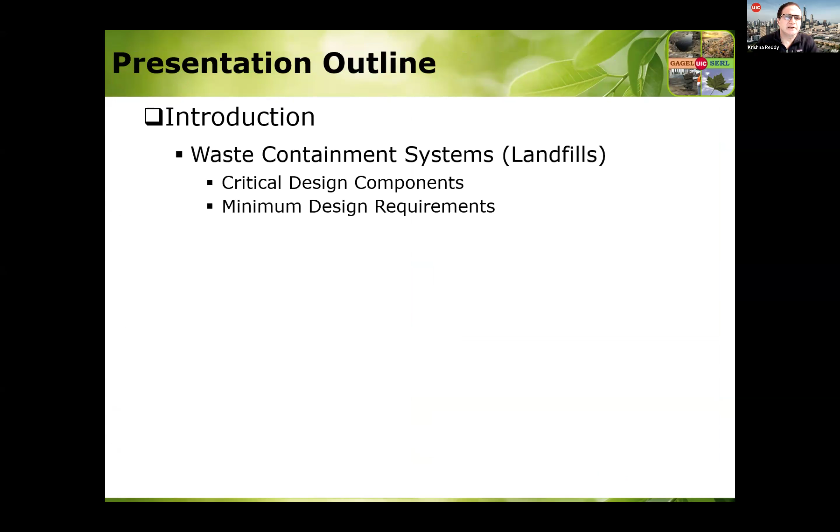Coming back to the presentation, first I want to introduce waste containment systems, basically landfills. I'll mention the critical design components and the minimum design requirements for them, then show how we can incorporate sustainability into the design of these components. I'll present a framework and examples of how to select sustainable waste containment components, and then give final remarks.

Let's get into the introduction. Many of you may not be familiar with waste containment systems for municipal solid waste. So what is municipal solid waste? It's any materials, trash, refuse, or garbage that you throw away from homes and small businesses. It's basically the garbage, and as you know, it is generally collected by governments from homes and small businesses.

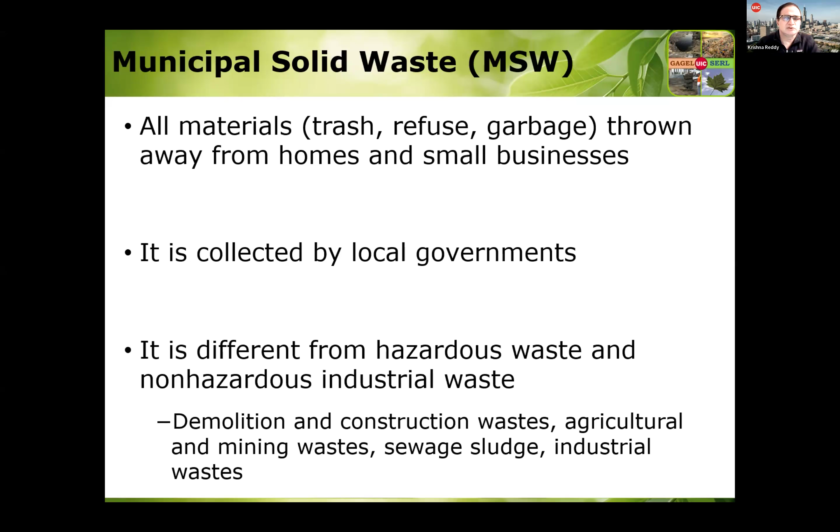Municipal solid waste is different from hazardous waste; it's generally considered non-hazardous. Sometimes you also have industrial waste that is non-hazardous, and this combined with non-hazardous household waste is what we call municipal solid waste. Obviously, it is collected and needs to be handled properly.

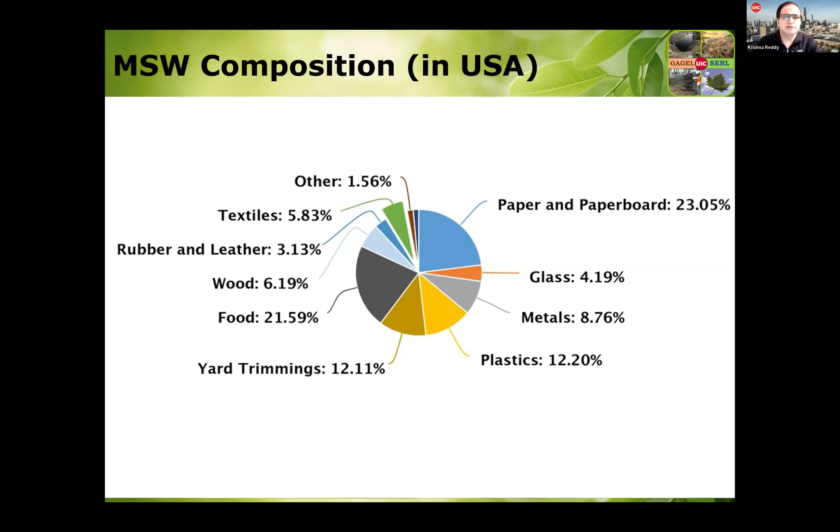Otherwise, this is the municipal solid waste you're looking at. The composition varies from location to location, but it's very important to handle properly. What is the composition of municipal solid waste we dispose of from homes or other facilities? This is the typical composition: it has plastics, metals, glass, paper and paperboard, yard trimmings, food, wood, rubber, leather, textiles, and other things. But this composition is from the US, and it varies from country to country, and even regionally within a country.

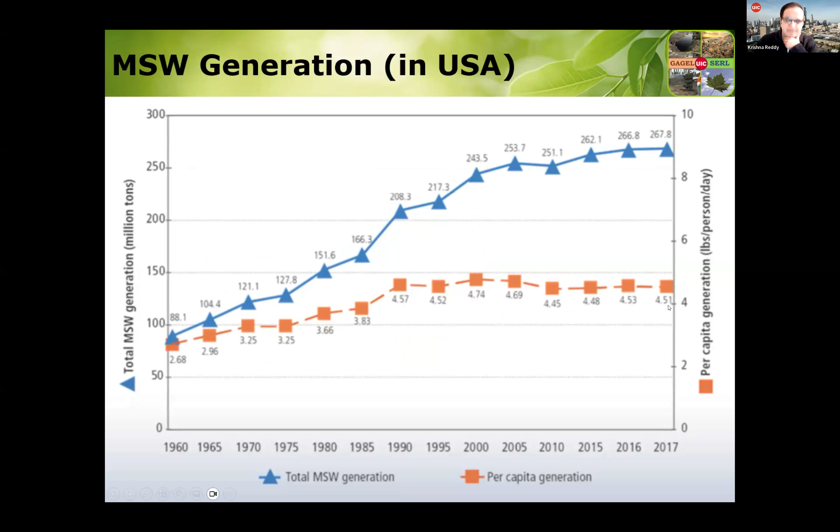In the municipal solid waste in the US, we generate about 267 million tons per year, which translates to about 4.5 pounds per person per day. That's a lot. So what are we doing with this waste that's generated?

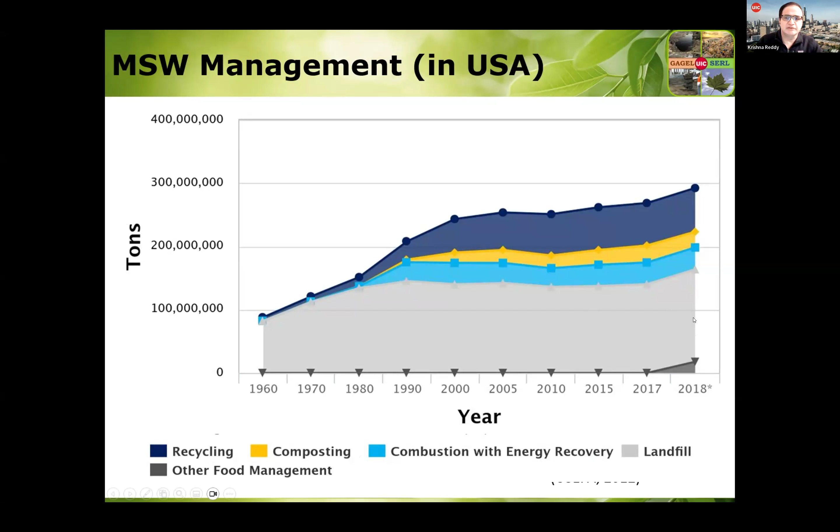This shows the total waste generated, and how much is recycled, composted, combusted with energy recovery, landfilled, and other management options. If you look at this graph, the landfill portion is more than 50% of the waste. So more than 50% of municipal solid waste is going to landfills, making landfills a very important aspect of waste management.

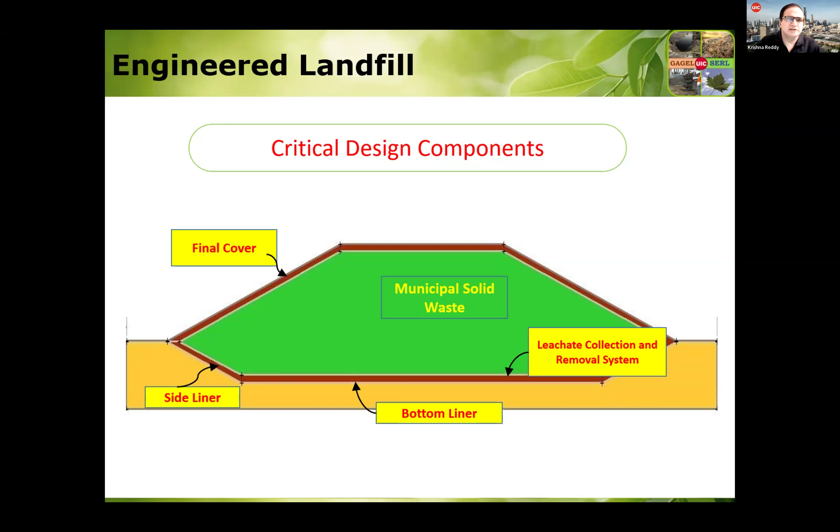Landfills are engineered structures with important components that need to be properly designed. Basically, you excavate below the ground, construct a bottom liner and side liner, and have a leachate collection and removal system. Then you pile up waste in layers, compact it, and once capacity is reached, put a final cover. From an engineering standpoint, the bottom liner, side liner, leachate collection and removal system, and final cover are extremely important and should be properly designed.

So in the US, we have federal laws and regulations that are applicable for landfills. The main federal law is called the Resource Conservation and Recovery Act, and it's a regulatory approach. You have to follow this.

Under this, US EPA has regulations that require dumps to be closed, and for new landfills, there are requirements on how to design them. The states must develop comprehensive management plans, and they might have more stringent landfill design requirements.

CERCLA, or Superfund, is another law that addresses abandoned dumps and landfills that pose an imminent risk. So any dump or old landfill that is not being taken care of and is posing a problem of contamination to the subsurface or surrounding environment gets immediate attention to be cleaned up under this law.

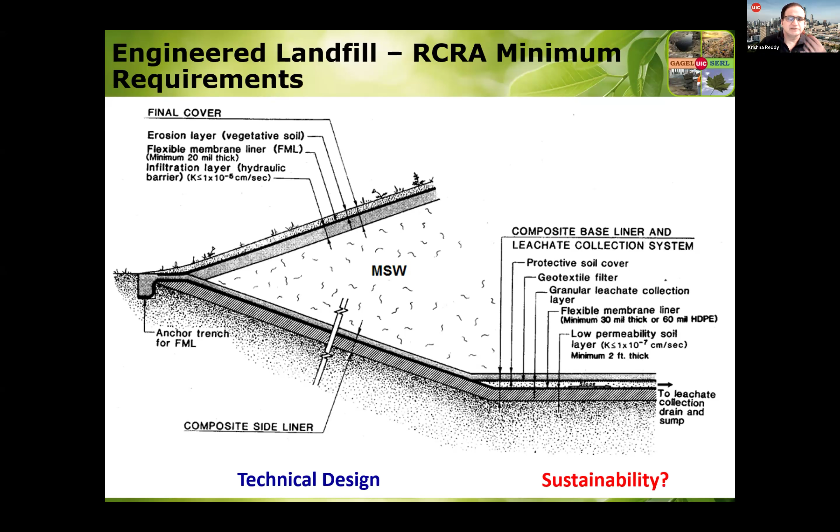A lot of times we just do the technical analysis and recommend the design, but we don't consider sustainability. Now it's becoming very important to consider sustainability in addition to your technical design. So you have to combine the technical design and sustainability so that you have a sustainable waste containment system.

If you are not familiar with landfill design, I highly recommend you look at this book. It tells you a lot of details about how you design the liner system, leachate collection system, and the final cover system - that's the waste containment system with its components and minimum requirements.

As I said, you do the technical design, but how do you do the sustainability assessment? Whatever I've designed, is it sustainable? Or are there other options you can think about, or can you optimize the system you are designing for sustainability? So this is important.

For this, you need to think about what sustainability is. This is the broad definition: development that meets the needs of the present without compromising the ability of future generations to meet their own needs. That's a very generic definition, but then you have functional definitions given by different agencies, and the definition is a bit longer than the generic one.

But the most important aspect of all the functional definitions is this: environmental, economic, and social conditions. That is often called the triple bottom line. So the concept, or essence, of sustainability is captured by these three aspects.

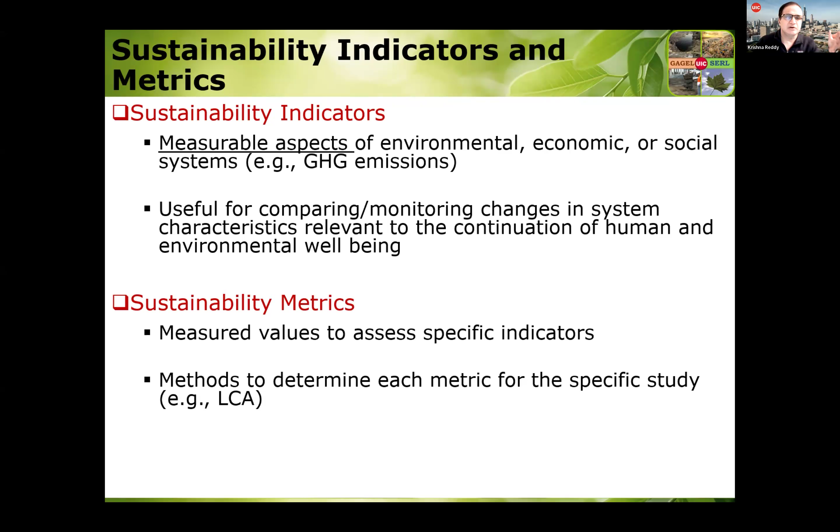In order to quantify sustainability, you need to define environmental indicators, economic indicators, and social indicators. Then you need to select them so that they have metrics, or can be expressed in numerical values, and you should have tools to calculate them.

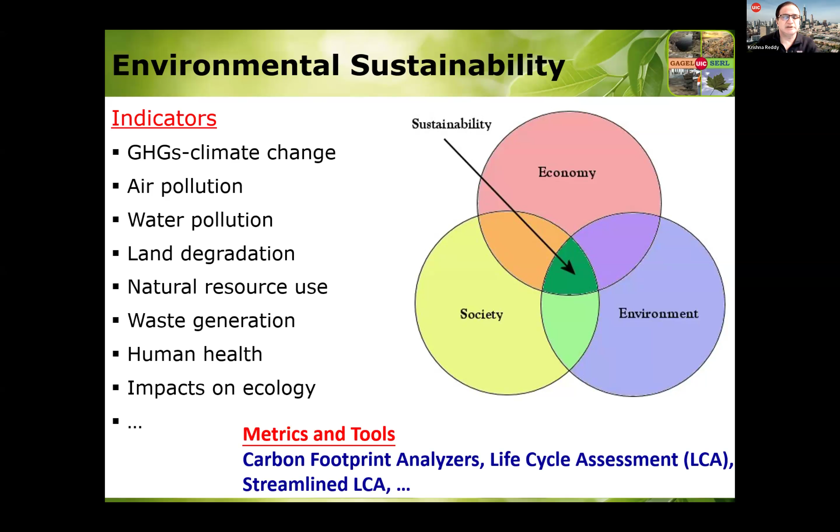For environmental sustainability, you can define indicators that represent various environmental impacts, and those impacts should be calculated using certain tools. For example, carbon footprint analysis gives you a carbon footprint, and a more comprehensive approach is life cycle assessment, or streamlined life cycle assessment. There could be a lot of other tools, but life cycle assessment, LCA, is the most comprehensive tool used to assess environmental sustainability.

Remember, a lot of people assume that doing LCA is a full sustainability assessment, but this considers only one aspect of the triple bottom line. Economic and social aspects are not considered; those are equally important and need to be considered in addition to environmental sustainability. LCA gives you environmental impacts, some indicators and metrics, which you can calculate.

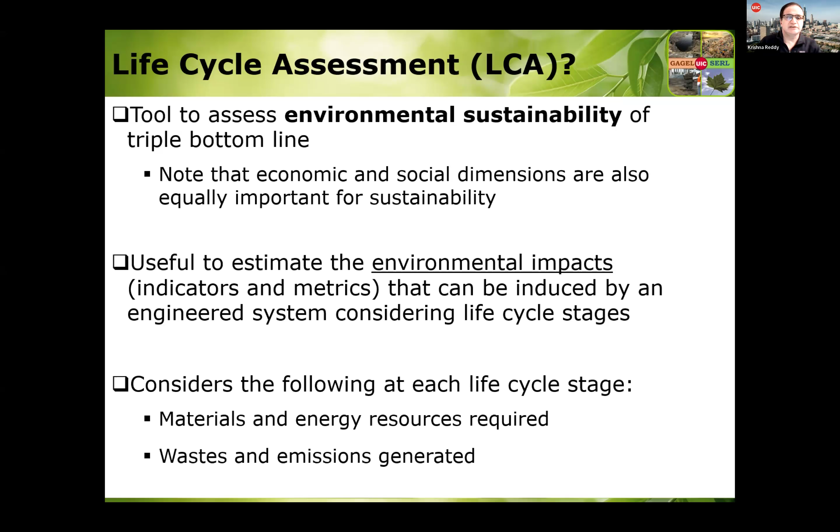You can calculate these things during the entire life cycle of a project, from raw material acquisition, transportation, construction, operations, and so forth. In LCA, you consider what materials and energy resources you are going to need, and the assessment gives you the consequent waste and emissions. So waste and emissions are basically the environmental impacts.

A good thing about LCA is that the method is standardized. ISO LCA standard, ISO 14040, is what you have to follow if you are doing the LCA approach. LCA is defined as the compilation and evaluation of the inputs and outputs and the potential environmental impacts of a product system throughout its life cycle. That's how the ISO standard defines it.

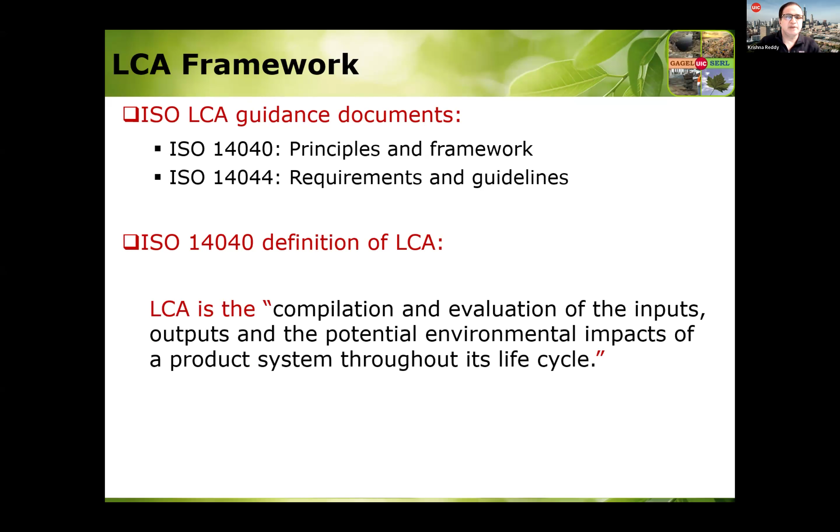So basically, as I mentioned, it takes materials and energy as inputs, and the outputs are the environmental impacts, which you can then assess from a sustainability point of view.

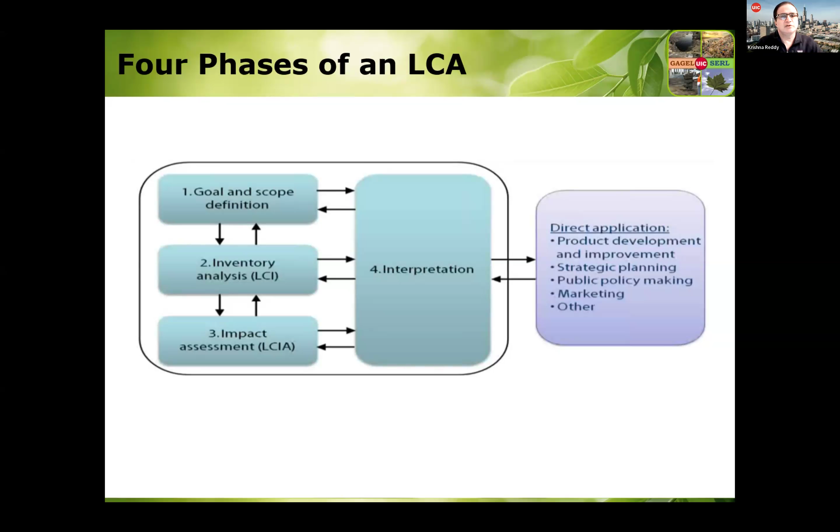This methodology has 4 phases: goal and scope definition, inventory analysis, impact assessment, and interpretation of the results. Anybody who does LCA has to follow these 4 phases or steps of the analysis. I'm not going to go into the details of those 4 steps.

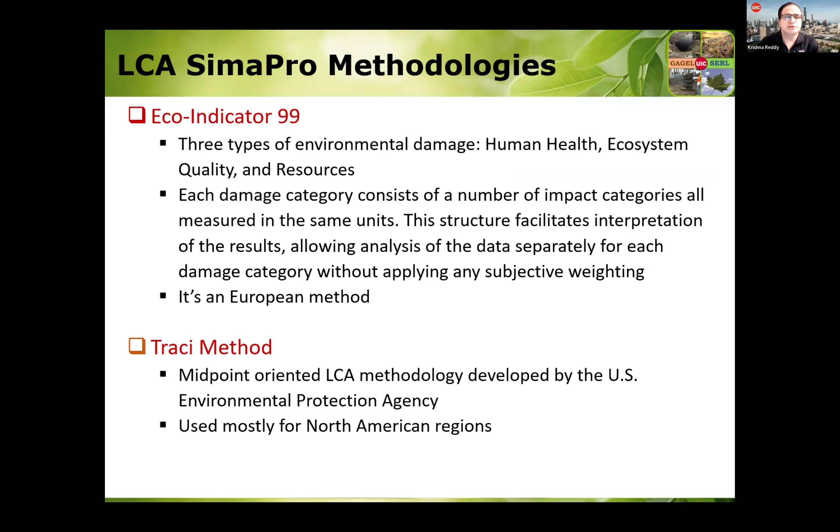SimaPro is one of the softwares used to perform LCA assessment, and within it, there are different methods of doing the impact assessment. Eco indicator is one of them; this is basically a European method. TRACI is another method, developed by the US Environmental Protection Agency. So in North America we use TRACI, and eco indicator 99 is used in the European context.

So if you are in India, you have to think about which methodology you should use for environmental impact assessment. That's about environmental indicators and metrics. If you have special tools, you can use those, but if not, LCA is the most general methodology to calculate environmental indicators.

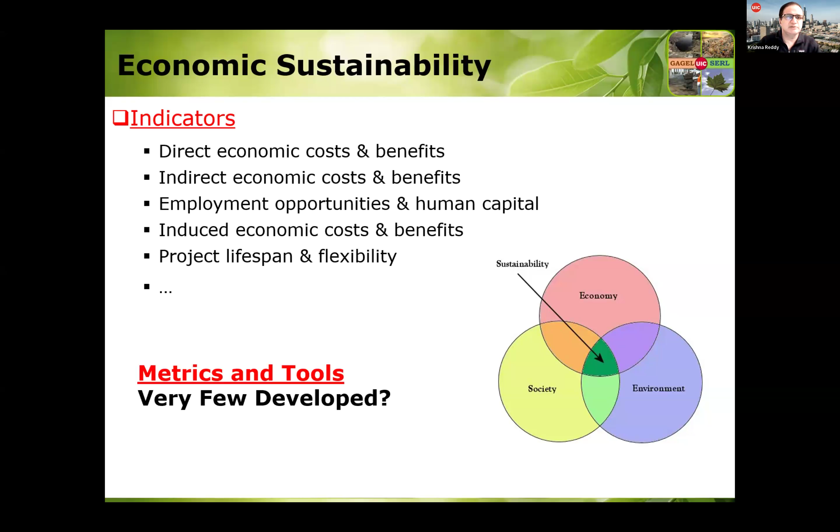In terms of economic sustainability, you need to identify indicators like direct economic costs and benefits, and indirect economic costs and benefits, and find appropriate tools. Often we are not familiar with economic assessments, but you need to get help or learn more. You can use tools like life cycle costing or cost benefit analysis and so forth.

For social sustainability, this is very challenging.

This is about how communities or individuals affected by the project are going to be impacted. So you need to be very careful about how you select these indicators. And then the problem is you need to be able to quantify it. There are not many tools to quantify this. One of the tools is the social sustainability evaluation matrix, or there could be other frameworks that, if you have access to, you can use those.

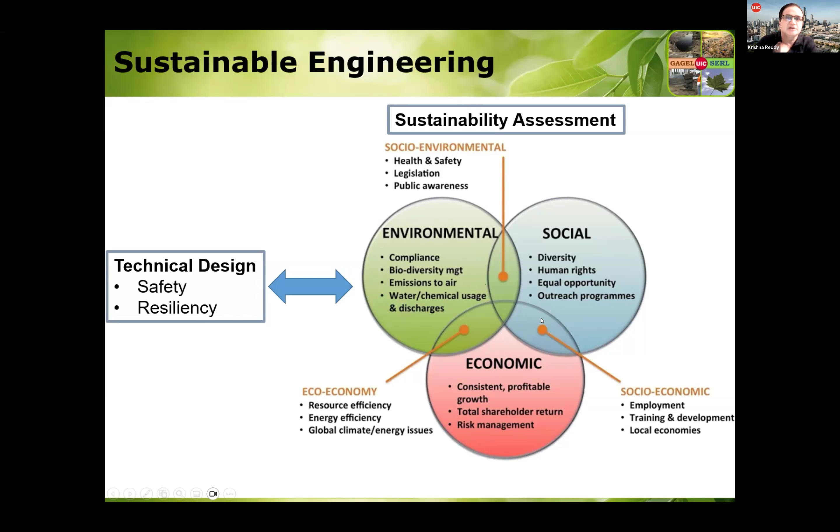So if you have those triple bottom line indicators and metrics, the sustainability assessment is all about calculating these indicators for your technical design. So you have the technical design that considers safety and resiliency, and then you subject that technical design to this triple bottom line aspect. That's basically called sustainability assessment - considering the environmental impacts, economic impacts, and social impacts, and quantifying them through indicators and metrics.

I know a lot of you may not be familiar with sustainability assessment, so I highly recommend you use this reference book so you can understand the basics, and also various tools on sustainability assessment. Once you have that framework, I want to show how this framework can be used to design sustainable waste containment systems. I'm going to look at different components of the waste containment system and how you can assess the sustainability of potential options.

If you want to choose this option, start with this requirement, and then do the performance analysis, and you may want to increase the dimensions of it. Now, this is called prescriptive criteria. But US EPA also gives you the flexibility to look at alternatives.

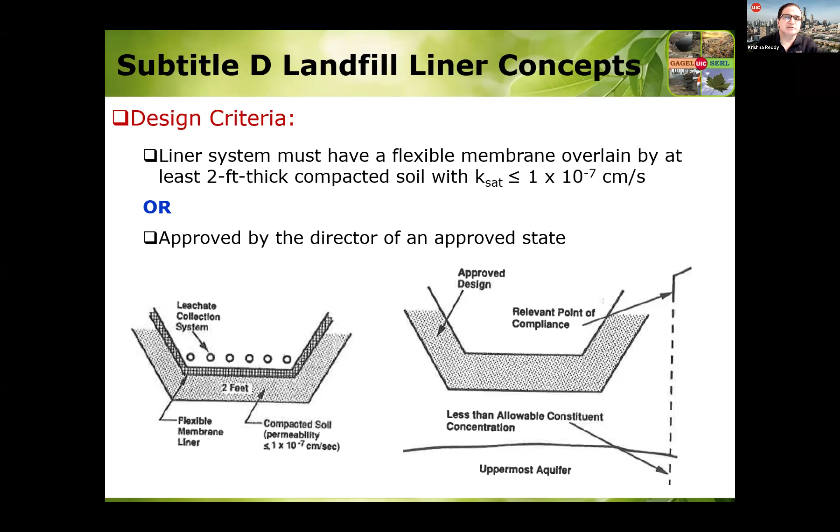Because of these things, you can have a very prescriptive design, or you can have alternative designs. Since regulations allow you to have alternative designs, you can apply the sustainability criteria and select something more sustainable. What I want to show you is examples of liner systems.

For example, this is the most conventional liner system. According to the regulations that you saw, you need to have compacted clay - for example, I'm looking at 24-inch thick compacted clay. On top of it is HDPE geomembrane, and then on top you have a leachate collection system and landfill waste. So this liner here is the composite liner - compacted clay and geomembrane. That's how the minimum requirements in the law state it. But you could have alternatives.

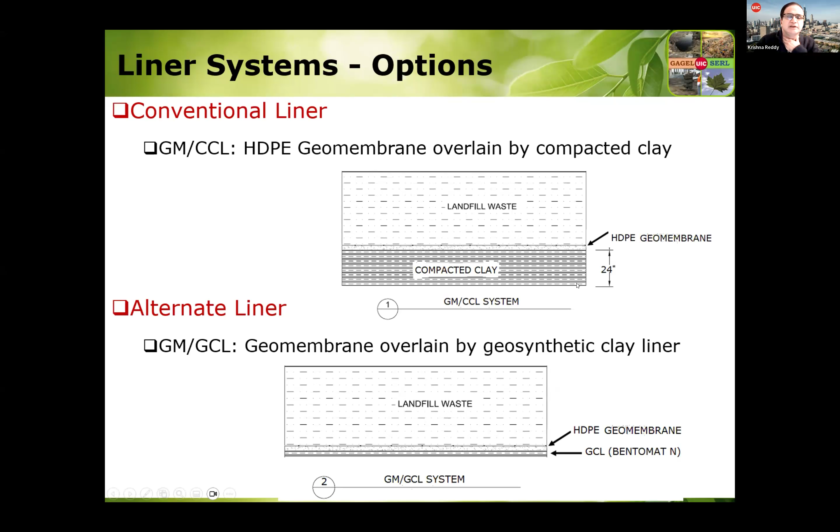So instead of compacted clay, can I use a geosynthetic clay liner? It's basically bentonite sandwiched between geotextiles, and that thin layer can be equivalent to 24 inches of compacted clay. On top, I have HDPE. So in terms of technical performance, you can demonstrate that these two are equivalent.

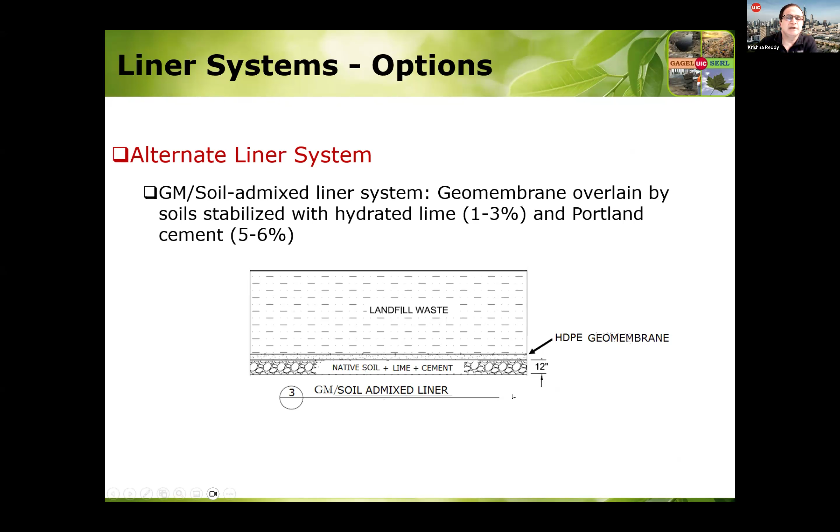Alternatively, they say if you don't have clay that is good - 10 to the power minus 7 centimeters per second - can you use native soil and add some lime and cement and make sure that soil meets the requirement of 10 to the power minus 7 centimeters per second, and then you can have an HDPE liner. So if you don't have good clay, you can use whatever native soil you have - maybe you can do this ground improvement option and make it equivalent to good clay.

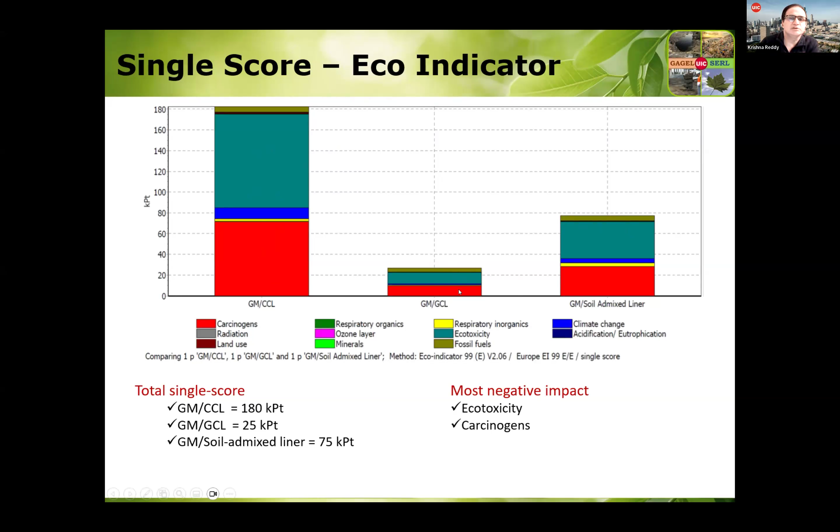More number means more impact. Geomembrane GCL has the least impact. Geomembrane and the soil admixture liner, that's the third option, as intermediate. So you can see from an environmental point of view, the most environmentally sustainable option is the geomembrane and the GCL.

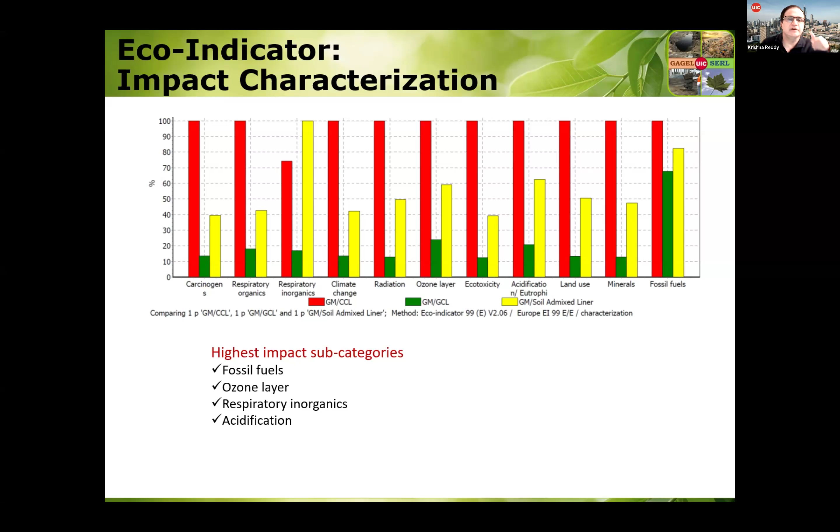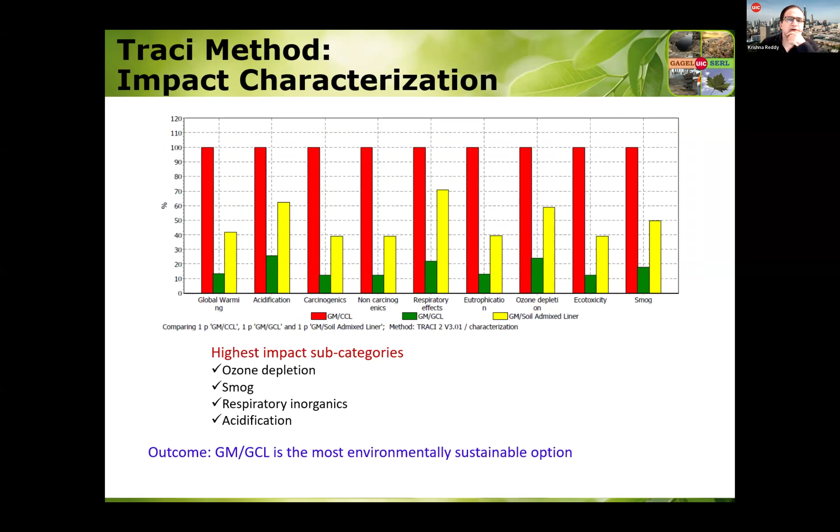So all three liners are performing very well technically, but from an environmental sustainability point of view, you can point out one is better than the others. The one I mentioned here is the eco indicator. Here is the TRACI method, which is used in North America. You will find consistently the same kind of results: geomembrane GCL is the most environmentally sustainable option. So that's the environmental dimension of sustainability.

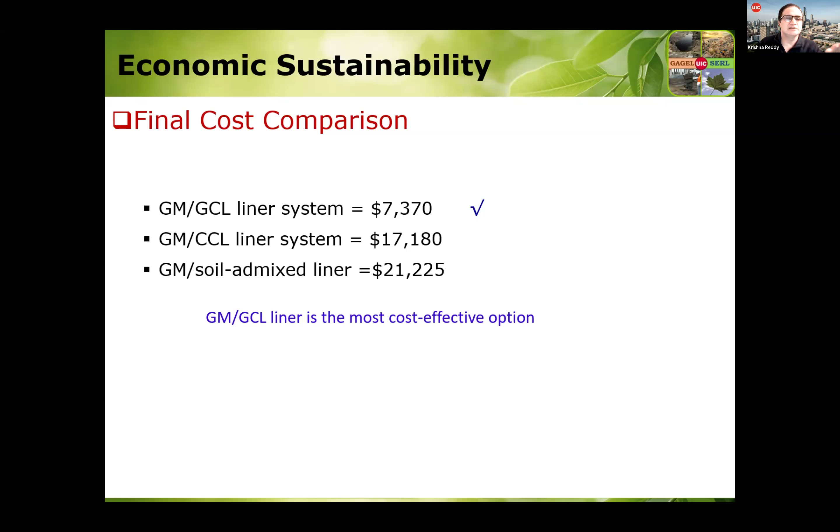You need to look at economic sustainability. Here I'm looking at just the cost, how much it costs for constructing these three options. You can see for 1 acre of landfill liner construction, geomembrane and GCL costs less compared to the other ones. So the geomembrane and GCL system is not only environmentally sustainable, it's also economically sustainable.

Last dimension is the social sustainability. You can have a different type of social sustainability assessment system, and this is the one we are using. We're looking at the impacts to the workers, to the consumers, local community, and society, and under each of these you have different impacts.

One simple way to quantify them is: 0 means no social impact, 1 means negative impact. So if you don't have any negative impact, it's 0, and if you have some negative impact, you put 1. You add them up for all these indicators. The one with a higher number has more negative impacts, and the one with a lower number has less negative impact. Again looking at this, geomembrane GCL has the lowest number, meaning it is the most socially sustainable option.

So from environmental point of view, from economic point of view, and from social point of view, using the geomembrane and GCL composite liner system is the most sustainable option. That's how you can look at the different alternatives for composite liner systems and select the better one. Let's look at other components.

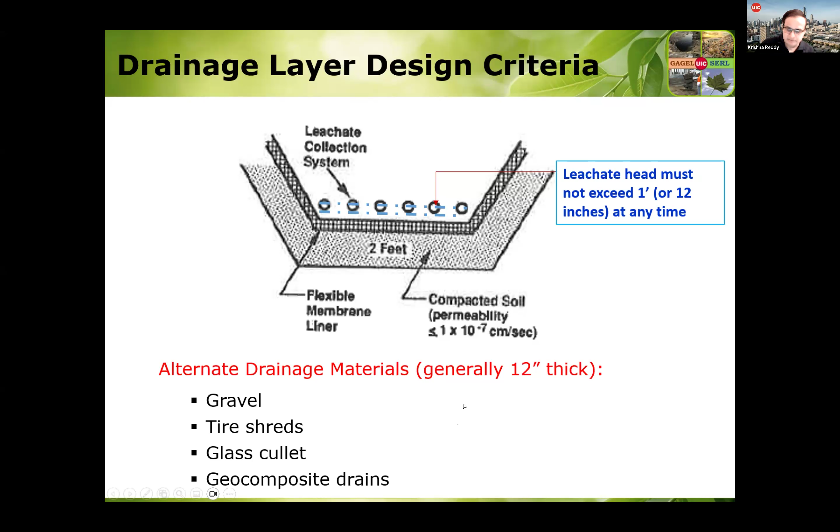So the granular drainage material that you can use, you have a lot of different options. You could use gravel, tire shreds, glass cullet, or geocomposite drains. The question is, all these things have high permeability, and all of them meet the requirement of 1 foot. So literally, you can meet the technical criteria, but from a sustainability point of view, which one is better to use?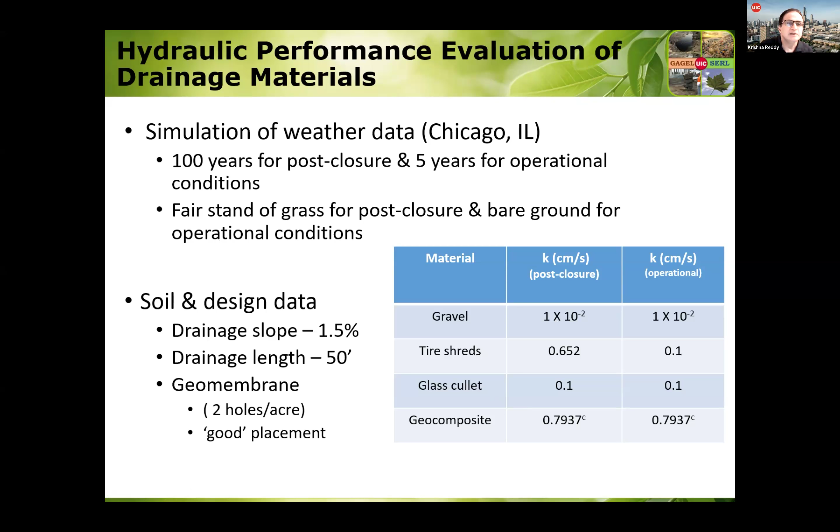For doing that technical assessment, we use the program called HELP. I'm not going to go into the details of it, but you need to input the hydraulic conductivity of the materials you're using - gravel, tire shred, glass cullet, and geocomposite - and specify the location. Then you simulate what will happen during the operational phase for like 5 years, or after closing, after putting the final cover, for 100 years - what will happen to the leachate buildup at the bottom.

You put all that information in and do the analysis, and our target is to make sure leachate head does not exceed more than 12 inches, so 1 foot. You can see that whether I use the gravel, tire shred, glass cullet, or geocomposite, my leachate head is always less than 12 inches. That means I can use any of these materials.

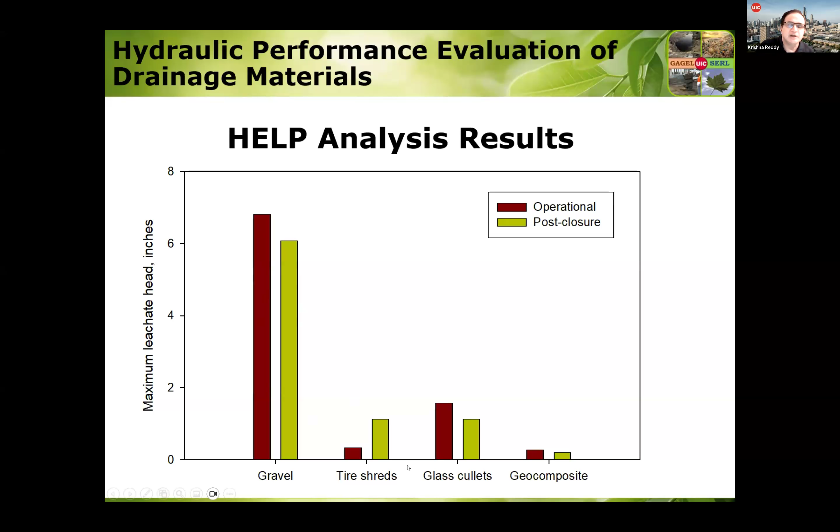Of course, these tire shreds, glass cullet, and geocomposites appear to be more efficient in terms of drainage compared to the gravel. So out of these materials, which one should I use from a sustainability point of view?

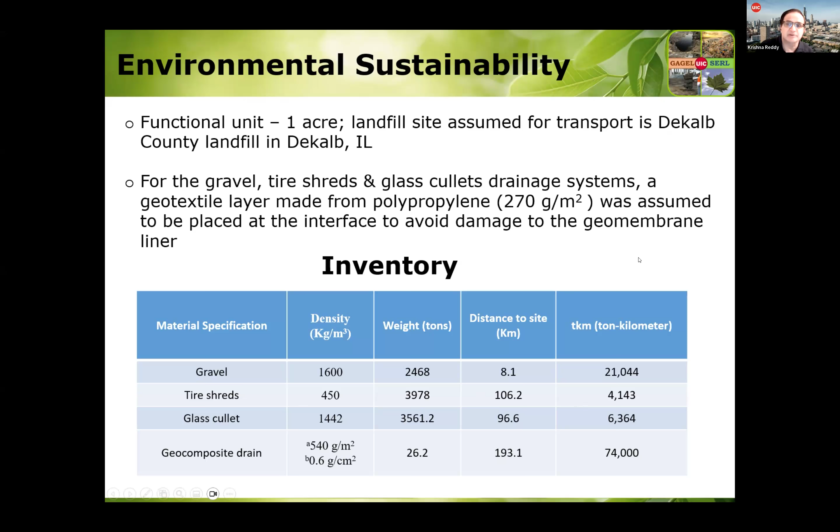So you do the environmental sustainability assessment. Again, we can do this for 1 acre, knowing the exact location of the landfill and what materials you need and where you're getting them from. Transportation distances are very important because transportation could cause a lot of environmental emissions. By doing the LCA analysis, you can calculate this environmental impact.

You can see that the higher value means a more negative impact. So the geocomposite drainage layer system has a higher value compared to these other systems. Based on that, you can see which material is more sustainable. The majority of the impacts come from fossil fuels during transportation.

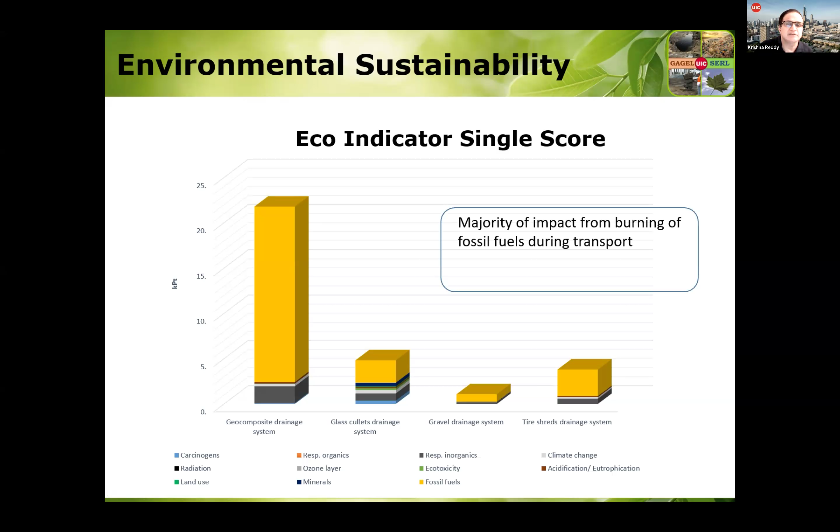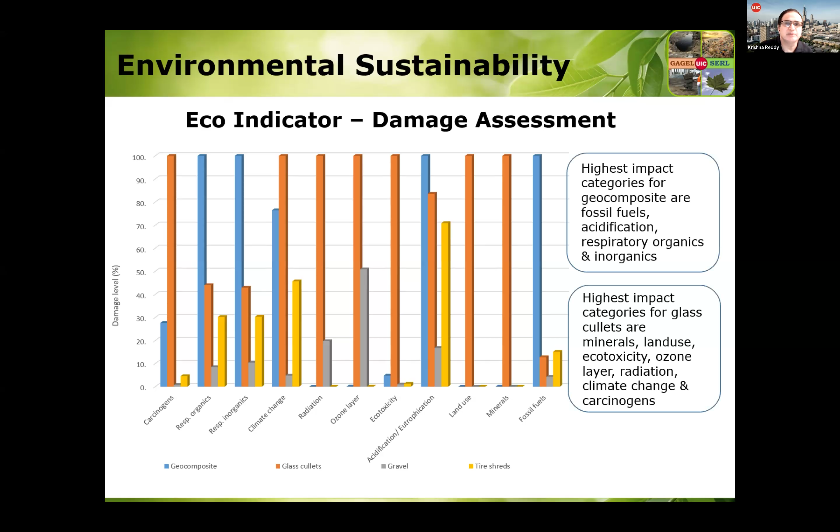So if one of these materials isn't available at the site and we have to transport it from long distances, then the environmental impacts associated with that will be higher - not because of the material, but because of the transport. When you do the LCA assessment, you can quantify all these different environmental indicators and compare all the options you have, and make decisions based on which one is more sustainable.

That's environmental sustainability. The second dimension of the triple bottom line is economic sustainability. At minimum, you can calculate the costs associated with this. But if you want to be more comprehensive, you can look at indirect costs, indirect benefits, and so forth. But just based on direct cost comparison, you can see...

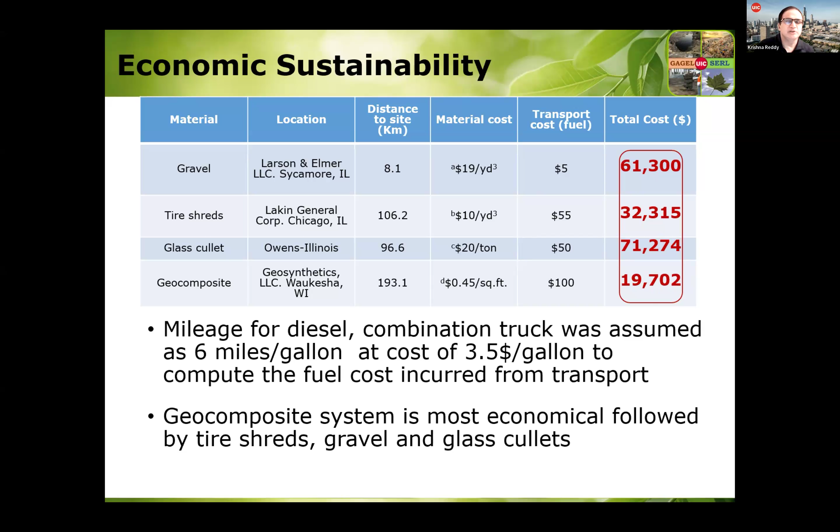The tire shreds cost is $32,000, whereas geocomposite is $19,000. So geocomposite comes out cheaper for this, based on the material availability and the transport distances you have.

And for social sustainability, again using the similar framework I mentioned for liner systems - you can say zero for no social impact, no negative impact. If you have some kind of negative impact, I can put 1. The one which has the lower value is more socially sustainable. The geocomposite drainage system seems to be more socially sustainable.

So you have environmental sustainability, social sustainability, and economic sustainability, and you have to make a decision based on those indicators and values. We can do the same thing for the third important component of the waste containment systems, which is the final cover.

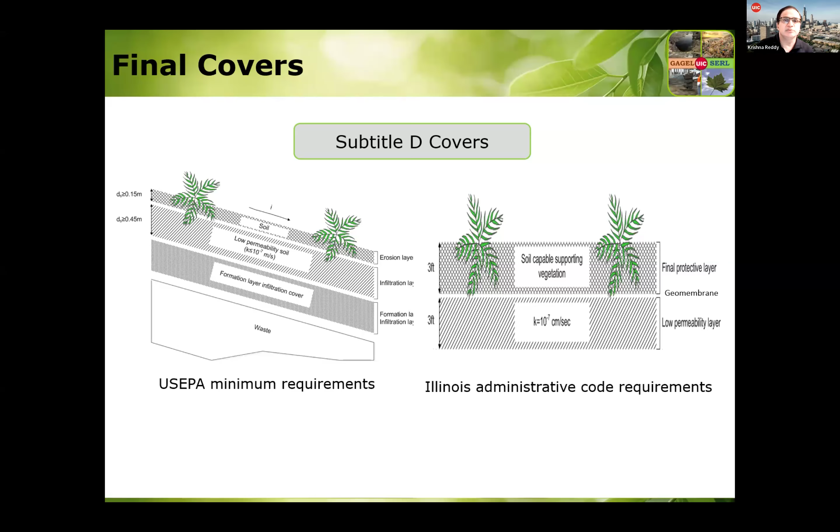As I mentioned, US EPA has the minimum requirements, and states could have different requirements. So you need to know what the minimum regulatory requirements are based on the location. You have to look at federal regulations and state regulations, and meet all of those requirements. That's the minimum requirement.

Then you need to think about other options, alternatives. Again, you can do the performance assessment to make sure the performance is satisfactory no matter which option you're looking at. Technical performance, you cannot compromise it.

Here I'm looking at Subtitle D without geomembrane. We have waste, and we're talking about the cover placed on top of the landfill. The waste is placed, and on top you have 18 inches of thick layer and an erosion layer. This is the minimum requirement - you have to have these two.

Sometimes you may have to use a geomembrane to reduce infiltration of precipitation. So here you have two clay layers, but in between you have a geomembrane. In some cases, you can have just a geomembrane - this is called exposed geomembrane.

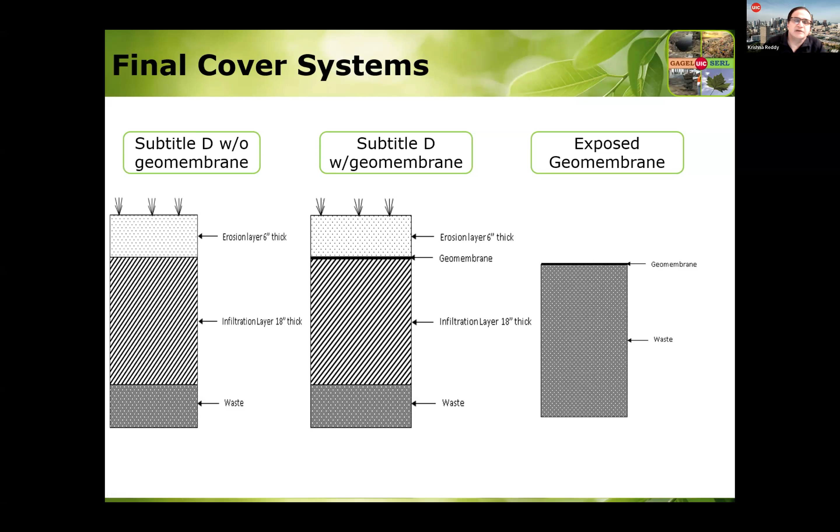So you can see this one is two soil layers. This one is two soil layers with the geomembrane. This one has no soil layers, just the geomembrane placed on top. There are some cases in the US where you have just the exposed geomembrane liner placed on top of the landfills. So these are three possible final cover scenarios for US landfill conditions.

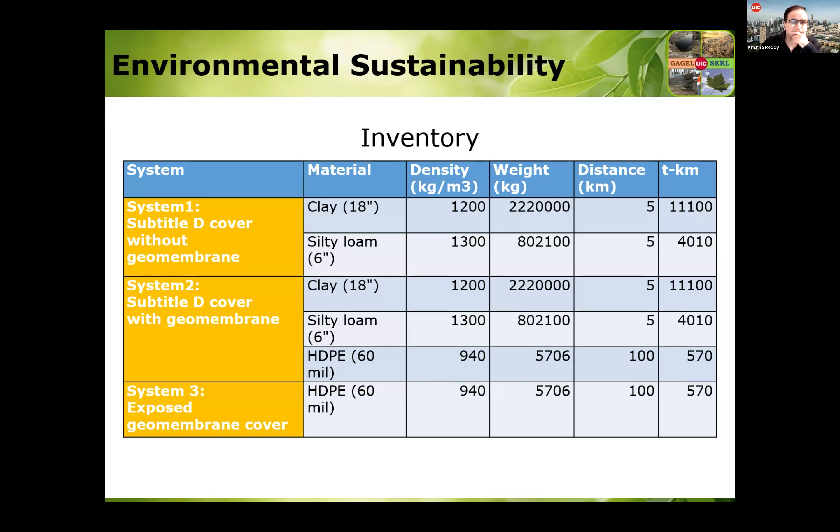If I assume 1 acre of landfill, for these three systems, what kind of materials do I need, and what is the distance from where they're available, and the transportation associated with that? You need the materials and transport distances, which basically calculates the energy or fuel, and then feed that into the LCA to look at impacts.

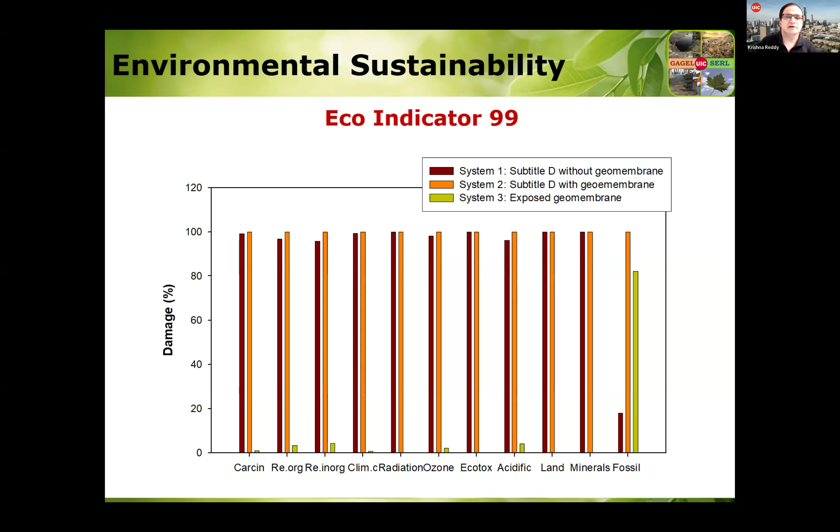So the relative comparison of these different environmental impacts for these three options - obviously exposed geomembrane doesn't involve too many materials or too much transportation, and that comes out to be better. In system 2, you have geomembrane as an additional component compared to system 1, so you see slightly more impacts.

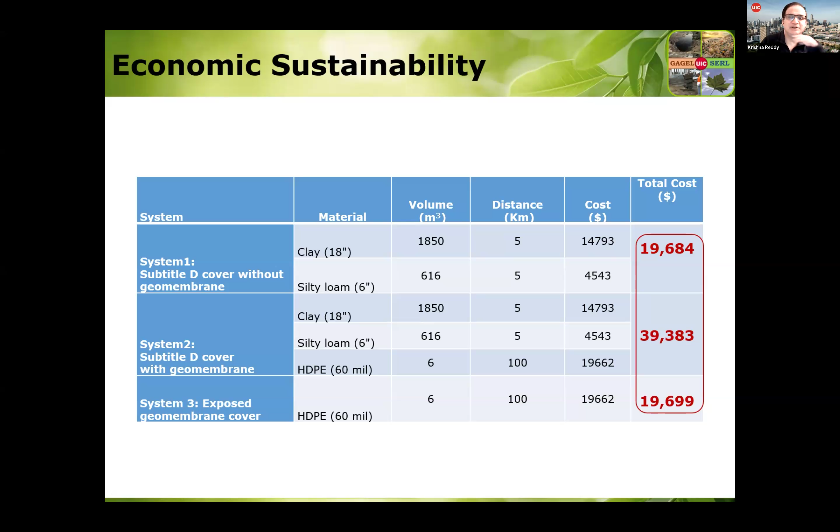And you need to look at the economic sustainability - how much is it going to cost? If you have system 1 and system 2, system 2 is more expensive because you have two layers and the geomembrane. In the third case, you have only geomembrane, which comes out cheaper. So an exposed geomembrane liner system, if possible for your landfill - it's not always recommended or possible, but if feasible, that comes out to be the best option.

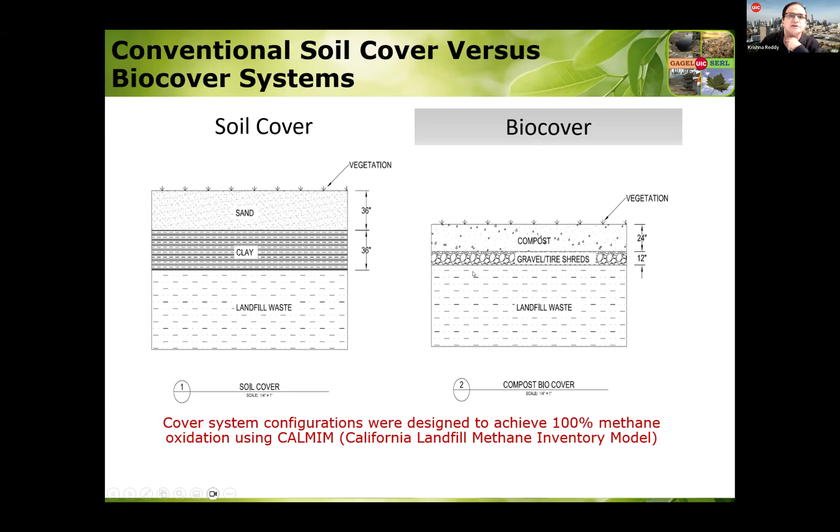There's a lot of research going on in terms of innovative cover systems. Our research project also involves developing biocovers. Here I'm showing you the soil system, and this is the second option of biocover systems.

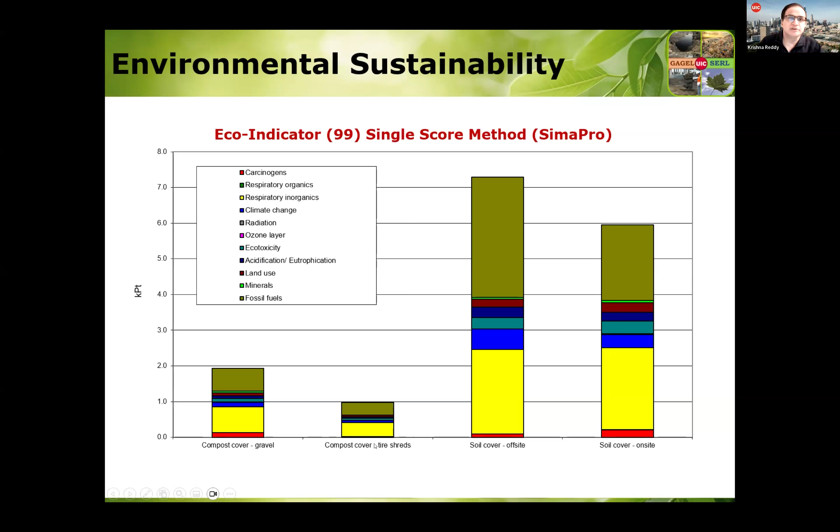If you can have a compost layer and tire shred as the drainage layer in the final cover system, that's going to be the most environmentally sustainable cover system. For economic sustainability, consider all the different materials, transportation, and the costs associated with this.

Recently what we did is try to combine those triple bottom line aspects, environmental, social, and economic indicators and metrics, and calculated what is the net sustainability index. Sometimes environmentally one option is better, socially another option is better, or economically some other option is better. If consistently one option is better from environmental, social, and economic perspectives, then it's a straightforward decision. But when you have conflicting results for this triple bottom line, then this kind of framework is important. We call it QUAICS.

That framework is one we developed recently. If you are interested in integrating resiliency for effectiveness to changing climate conditions and consequent environmental, social, and economic impacts, you can calculate all those indicators and integrate them, and we can calculate the so-called resilient sustainability index, TQUALICSR.

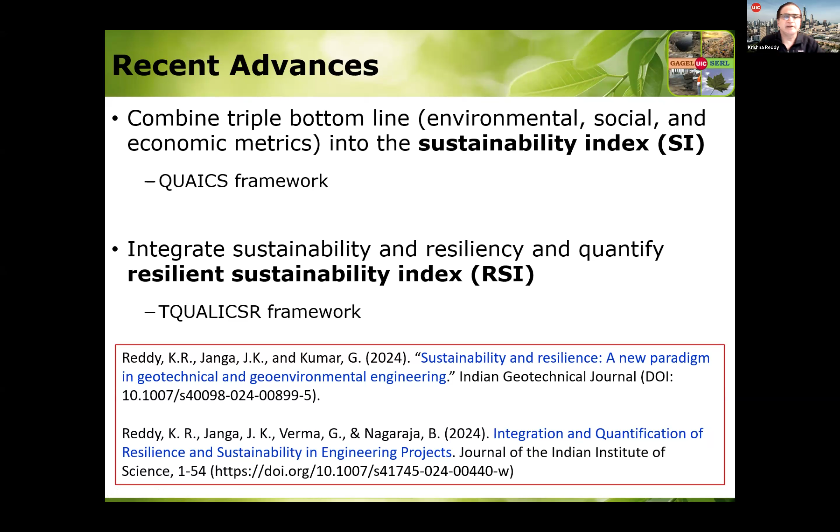Because of time, I'm not going to talk about this integration of all these triple bottom line aspects, but I highly recommend you read these papers that provide very good information about these recent advances we made in quantifying sustainability and resiliency.

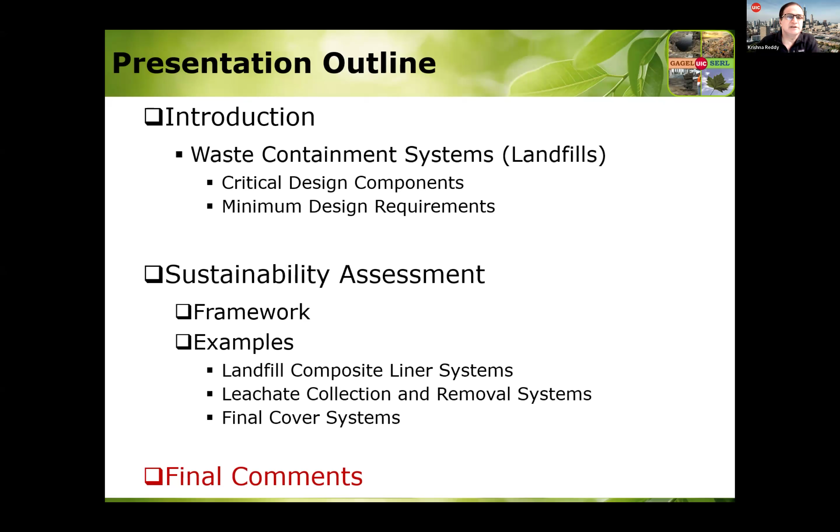I know I've gone quickly, but hopefully I've demonstrated how you can do the sustainability assessment and pick the option that is more sustainable.

In closing, you need to look at the technical performance for whatever you are designing, make sure it's safe and meets the requirements. Then you can add on sustainability criteria and make sure it performs well and is also sustainable. It's a triple bottom line aspect.

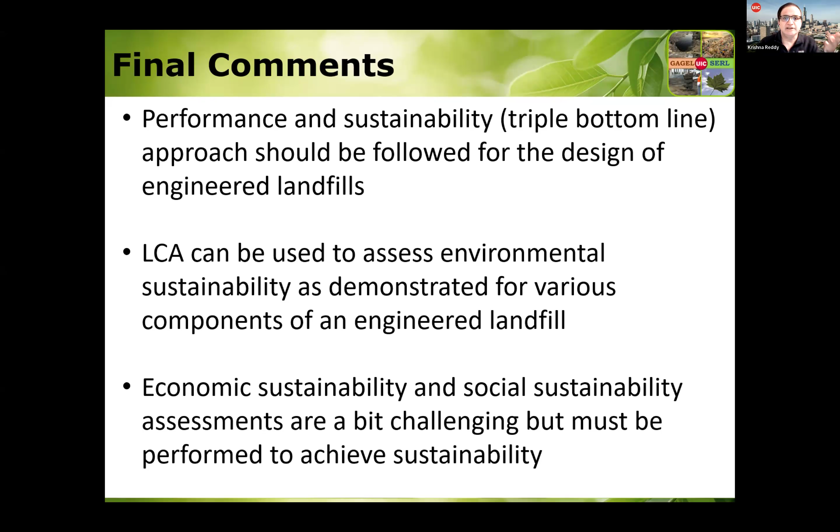You can use LCA for environmental sustainability; that methodology is well established. But you may encounter challenges in performing economic sustainability and social sustainability assessments. You really need all three - environmental, economic, and social - in order for it to be truly called a sustainability assessment.

I showed you this whole general assessment methodology for the liner systems, leachate drainage media selection, and the final cover system. Balancing these environmental, economic, and social impacts is challenging - that's where you need to do the integrated sustainability assessment, as I mentioned we did recently.

One system may be sustainable for a particular project, but not necessarily always sustainable. You really have to look at site-specific, project-specific conditions, because materials may be available at one site and not available at another. You may have to transport from long distances for that particular site, and obviously that's going to result in a different sustainability condition.

So you need to do the sustainability assessment for a specific project. You cannot generalize by doing the assessment for one project and considering the same results for others. Currently sustainability is encouraged but not mandated, but it's highly important to consider both technical and sustainability aspects. Hopefully that gave you some ideas on how to integrate sustainability in the design of waste containment systems.